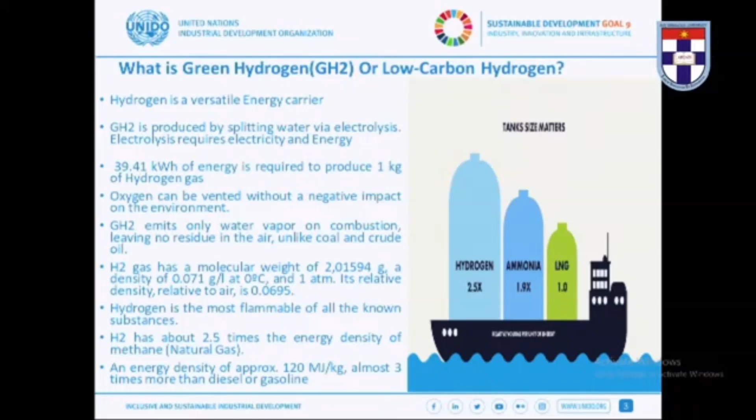So it has one of the highest energy densities, and this data estimates 120 megajoules per kg of hydrogen. So it's high energy and intensive. These are some of the parameters of hydrogen that we can see there. Like the moderator said, it is the number one element in the periodic table.

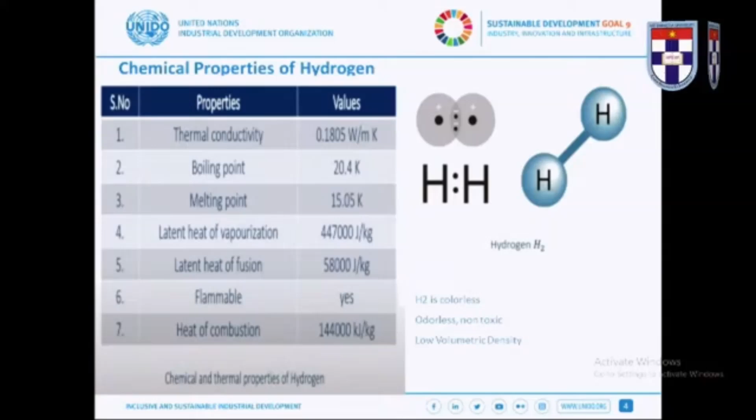So this again talks about the connection between green hydrogen and industry and the ecosystem of low carbon hydrogen. I mean, you can connect it to industry. There are several products that I'm going to talk about later on that can be generated from hydrogen.

Some of those products are currently being produced today, but the process of producing them pollutes the environment by producing a high amount of carbon dioxide. So green hydrogen presents an opportunity for us to produce some of these other materials more sustainably, in a cleaner manner.

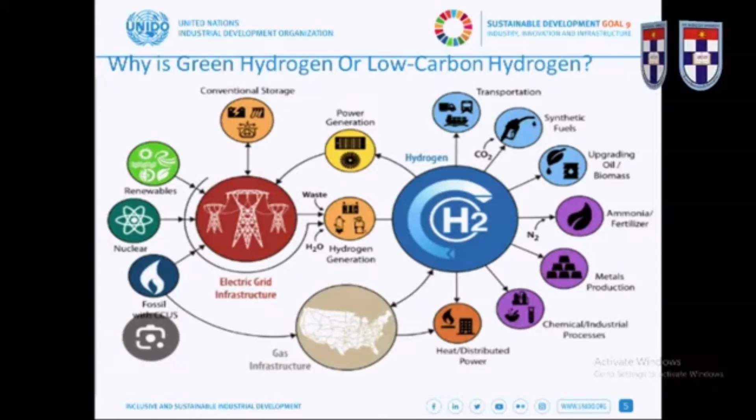Just to give an idea of what we are talking about in terms of economic benefit, it is projected by 2028 that the green hydrogen economy will be valued at about $271.1 billion US dollars. We're now in 2024, so we are moving ahead. And currently, a large percentage of the hydrogen being produced and being used comes from natural gas, which produces a lot of CO2 emissions, polluting the environment, causing climate change and all of that.

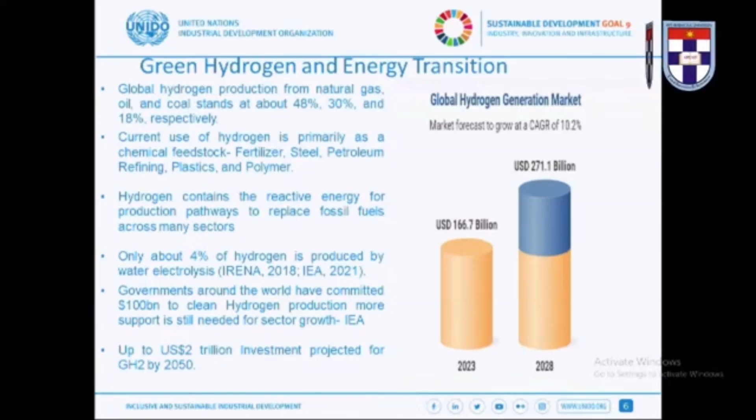So just to take it further, President Bamidele talked about the 4 colors. Here I have 6 colors. In fact, there are about 8 of them right now. So the black is hydrogen that is produced from black coal. You have brown, hydrogen produced from brown coal. Then the gray is hydrogen produced from natural gas or methane reforming.

The blue hydrogen, like I said, is hydrogen produced from natural gas, but with carbon capture. So instead of allowing the carbon to go into the atmosphere, it is captured or stored and used in some other form. Then you have the pink hydrogen, also similar to red hydrogen, which is hydrogen produced from energy sourced from nuclear power. There is another interesting one, the turquoise hydrogen. I'm going to talk a bit more about it later on.

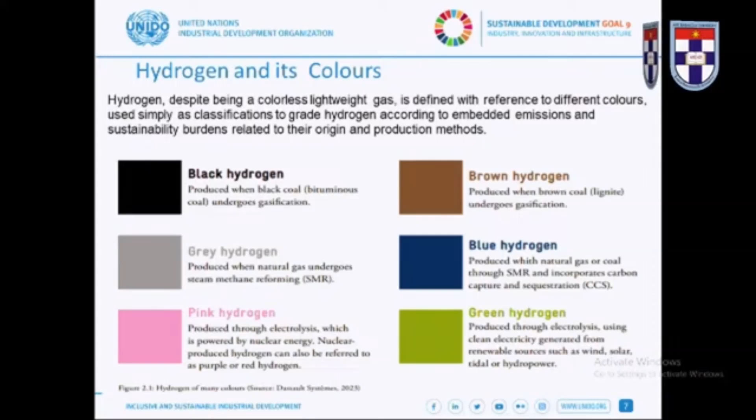It is projected that by 2050, the market globally will be requiring 585 million tons of hydrogen per annum. Currently, only about 100 million tons of hydrogen is being produced. All kinds of hydrogen being produced today is about 100 million tons, and that is being used. And we know there are several sectors that currently use hydrogen globally. We'll talk about that a bit more.

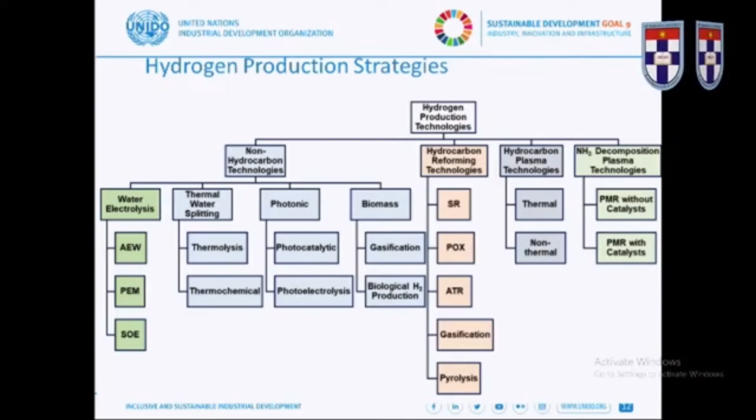I want to try and be a bit less technical, but this is a snapshot of several processes by which we can produce hydrogen. There are several of them that technology and science have offered us. However, we see that there are some that are preferred, that are environmentally friendly, which are the non-hydrocarbon technologies. So we have methane reforming, steam methane reforming, partial oxidation, autothermal. I'll move faster. Current hydrogen production efficiencies: we see steam reforming, electrolysis.

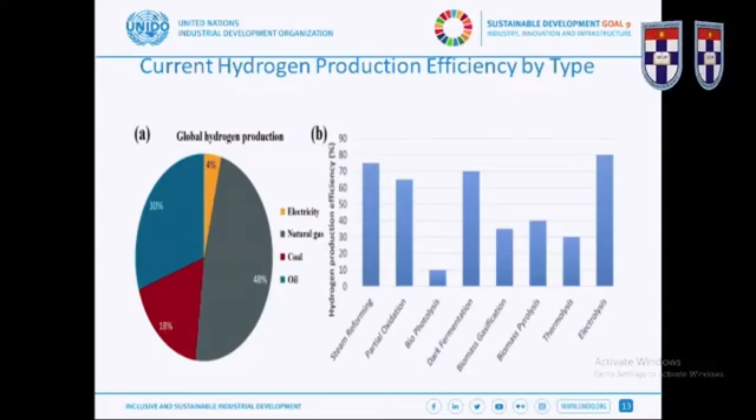So this is also giving us the idea of what the current production and technology is like. I'm particularly emphasizing some of these points because we are in the university, ABUAD International University, and the Hydrogen Institute aims to also key into some of the technologies that are required for hydrogen production.

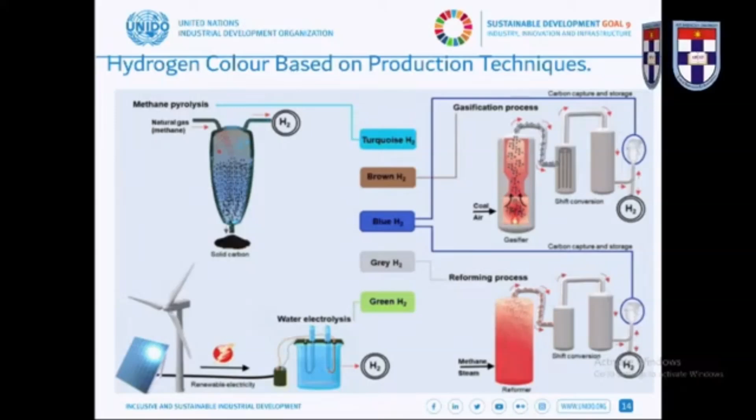So you can see that there is a possibility to also have sustainable hydrogen, clean hydrogen from natural gas. But the technology is still evolving. It's still at the R&D stage. It can improve with further research. And it's a challenge to all of us, and particularly to the university. So, just the basics of what the technologies look like. Yes, from coal, from methane, from electrolysis. And then steam methane reforming, we talked about it earlier.

But what I wanted to bring out from here is for us to have a feeling of the kind of pollution. It says that an emission intensity of about 9.5 kilograms of CO2 per kilogram of hydrogen is produced from steam methane reforming. So when we use methane or natural gas to produce hydrogen, which is what is dominant today, 90% of the hydrogen that is produced today, which is 100 million tons, comes from steam methane reforming. And each kilogram of this production generates 9.5 kilograms of CO2. So you can imagine the amount of carbon dioxide that's injected into the atmosphere from the current production.

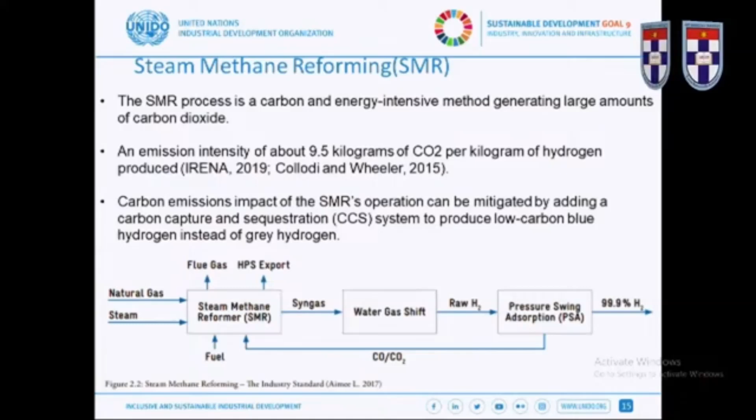So if we expect to increase to over 500 million metric tons by 2050, you can imagine the amount of additional CO2 emissions that will be generated here. And this, of course, comes back to our environment, the droughts that we're talking about, the flooding that we are talking about, the climate change that we are talking about. So it is important for us to be able to integrate carbon capture, usage and storage. So in the Nigerian context, I think I just covered this, the context of turquoise hydrogen, and the need for further research in this area.

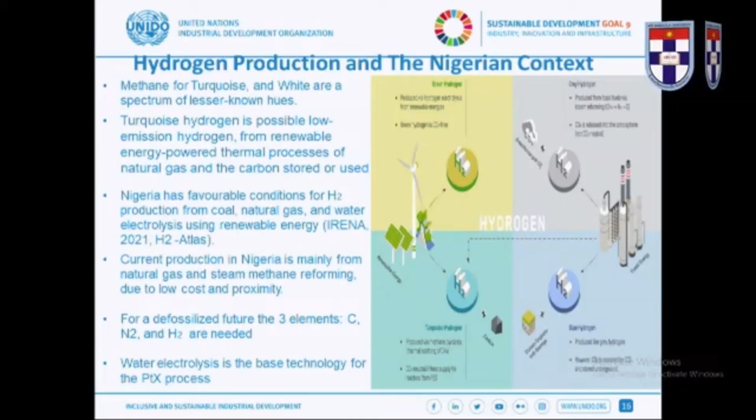So what are the drivers of the green hydrogen conversation? We talked about decarbonization, defossilization, energy transition, which is all the conversation we've been having. The Nigerian government is committed to net zero by 2060, which means that we are all committed to achieving energy transition and net zero by 2060. Hydrogen presents a viable opportunity for us to move in that direction. And of course, with green hydrogen, there is potential to produce many other products; many other industries that will be considered green can come out from these production systems, from producing hydrogen sustainably, and I'm going to talk about that briefly as we go on.

So it's also possible for us to use green hydrogen to produce products that can be used for long distance transportation, such as marine fuel. Methanol and ammonia have been shown to work well with internal combustion engines for ships, for airplanes and all that, long distance traveling.

So the value chain, I think Professor Bamidele also talked about this. The idea is to use renewable energy used in electrolyzers, produce the hydrogen fuel, so we need to distribute it, to store it, and then we apply it in industries, also as transportation fuel.

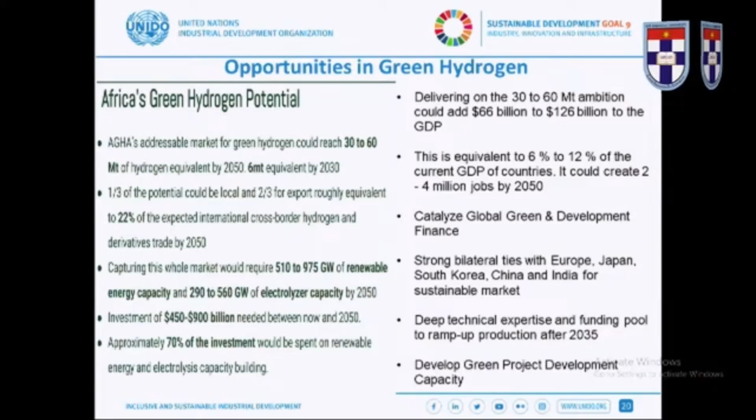This can be used to produce a whole lot of energy that can then be stored in the form of green hydrogen. Geothermal: there are studies that have shown that there are potentials in different parts of the country where we can achieve geothermal energy, wind energy as well, wave and hydroelectric power.

We are already using that a lot, but there are several dams. Yesterday we were talking to the founder, Chief Afe Babalola, and they mentioned that there are some small hydro projects or facilities already in ABUAD University, currently deployed for some of the energy supply to the university. I think this can be scaled up all over the country. We have small water bodies, streams, and flowing water from which we can generate a lot of small hydropower, and we should continue to expand on these opportunities.

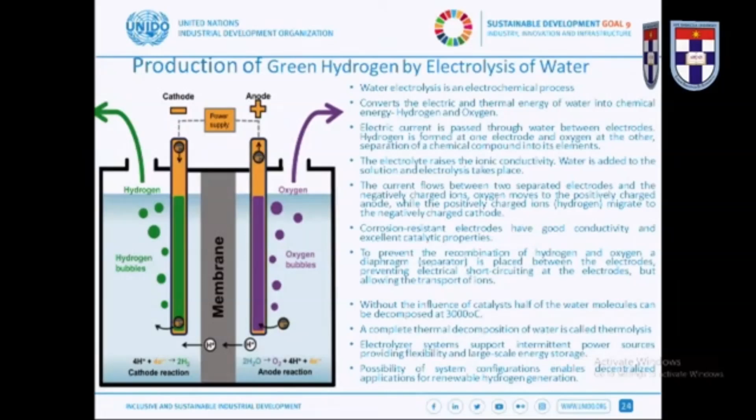I won't go over electrolysis, I think Professor Bamidele talked about that quite a bit. So there are three electrolysis systems that I wanted to highlight: alkaline electrolysis, proton exchange membrane, and solid oxide electrolyzer cells. Those are the three major technologies used today that are scalable for the production of green hydrogen through electrolysis.

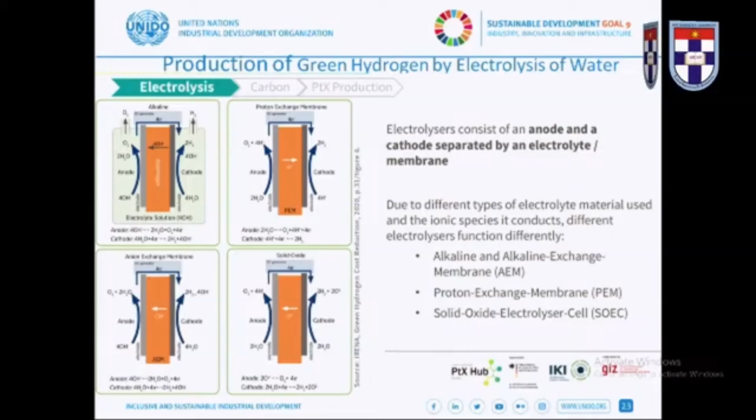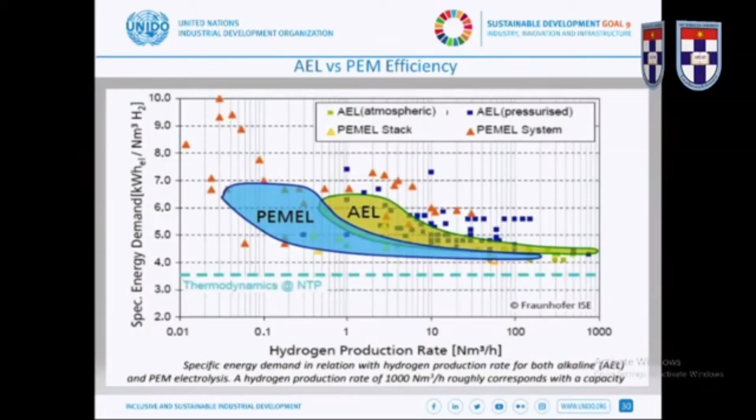The three technologies I talked about have their own parameters. Some are more advantageous in certain areas where we have waste heat, where you can use them more efficiently. You can scale in certain areas depending on the properties and available resources in different locations, and they all have different levels of efficiency. Each of these technologies also has interesting areas where research is still needed to improve processes and efficiencies, whether it's catalysis, system stability, or faster dynamics for the production systems. These are all interesting areas that researchers and academics are really looking to develop and research.

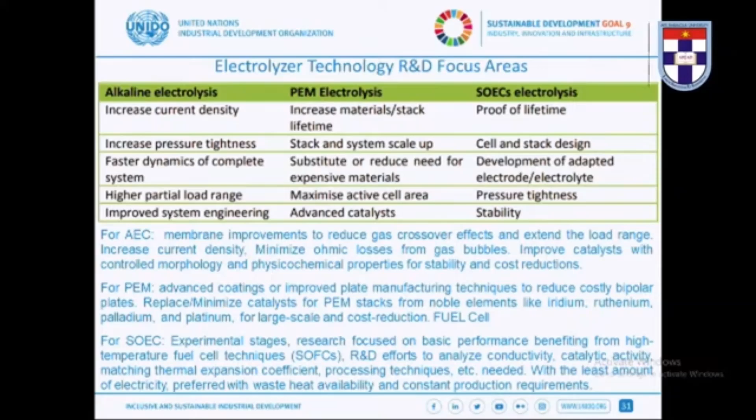As the director of the Hydrogen Institute, Professor Afolalu, mentioned, these are also suggestions about research areas. But there's somewhere I want to get to quickly because they are important for our conversation.

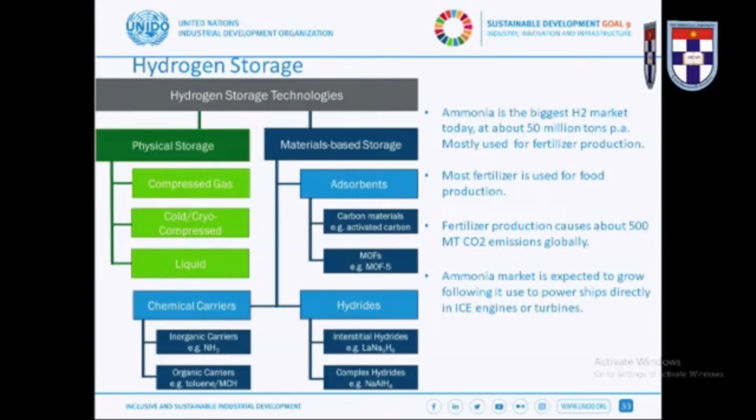Hydrogen storage: there are also several technologies that have been developed that allow hydrogen to be stored for a long time. So you have several storage technologies that I've highlighted here, whether it's as compressed gas or as liquefaction. Energy can be stored and transported in liquid form. Ammonia is the biggest market today for hydrogen, requiring about 50 million tons of hydrogen.

So those are also some of the technologies that we have for hydrogen storage. We have ammonia, we have methanol. Each of these...

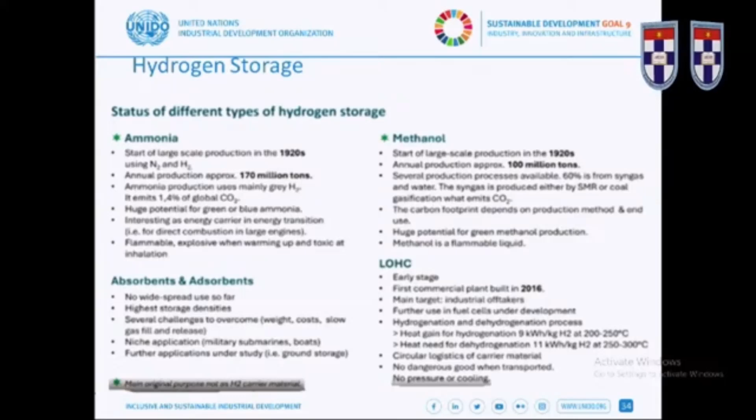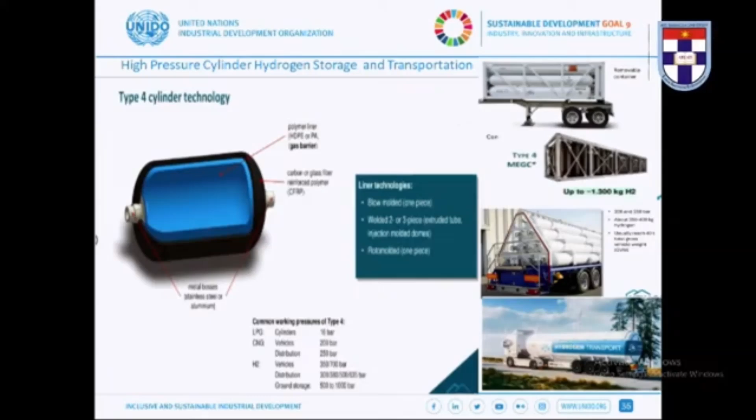I'm told that my time is almost up, so maybe I'll just round up in about one minute. Just to highlight some of the technologies that are going on all over the world, again, like I said, this is to trigger some thought in us to see what the challenges are in this field and what we need to do.

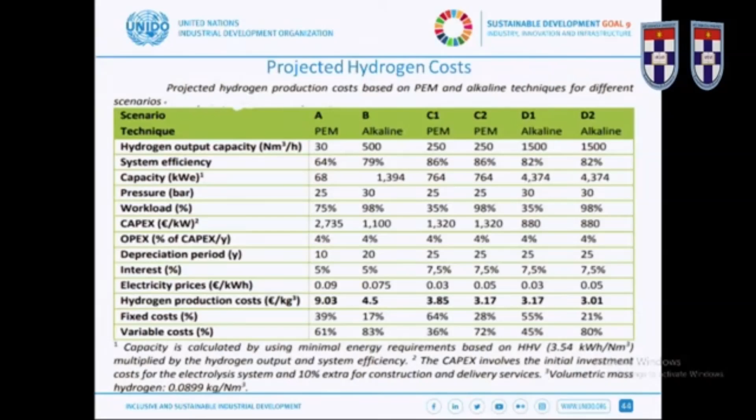I wanted to briefly talk about P2X. We'll continue all of this in the workshop, I'm told. Just for our audience, yes.

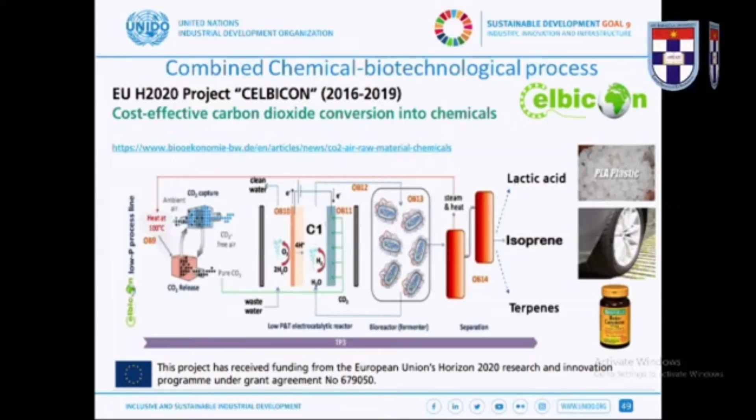This P2X makes it possible to produce many chemical materials from hydrogen. One of them is lactic acid, isoprene, terpene. These are high-value chemicals that if we produce green hydrogen, we can then go ahead to produce some of these products that can generate a lot of revenue for us as a country. Thank you for your attention.

We'll take you further in the workshop session, where we'll be able to talk about all of these enormous potentials for the country. Thank you very much.